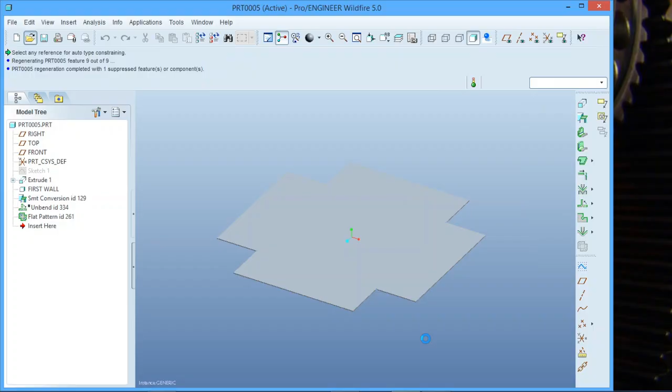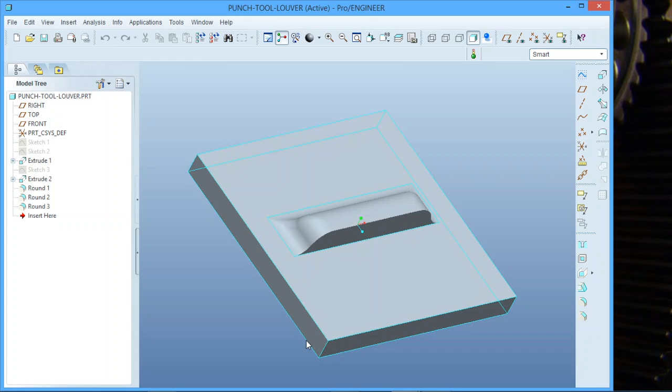So obviously if we're going to punch, we need a punch tool. So the first thing we're going to do is create a punch tool. I've already created one, which I just want to show you guys. This is just a normal louver tool. Depending on the dimensions of your louver that you need and want, you design this extrusion. The most important part is this surface here, because that's what you're going to align your punch with. This can be thinner, 5mm, 3mm, 1mm. I've made this one 10, so it's fine, I'm happy with that. I'm only going to use the front reference here anyway.

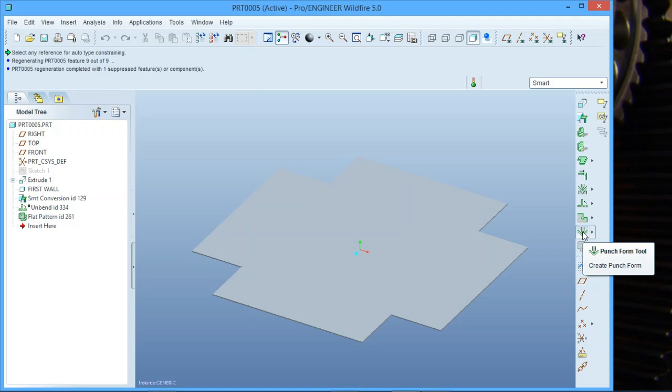So then we're going to go back to our part. Now a neat little thing is, if I click on my punch tool right here, you'll see the flat pattern will go back to a suppressed state, because we need to punch it in its fully formed state and then it will go flat. So let's click on here, and as you see, there it is.

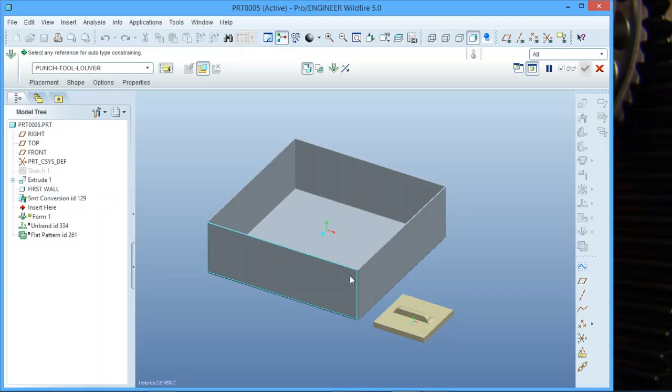I've already selected my tool there on the previous one, but let me just show you how you do it. You just click on this little window here, click on your louver tool, say open. Now there's two ways to do it. You can do it like this, where it's giving you this next to this, or if I click window in window, it will give it to me like this. Then I can select there and all my surfaces. But if I don't want to do it like that, if I do that it will take that one away. If I don't want that one, I click on that one and remove it, and then it gives me this tool.

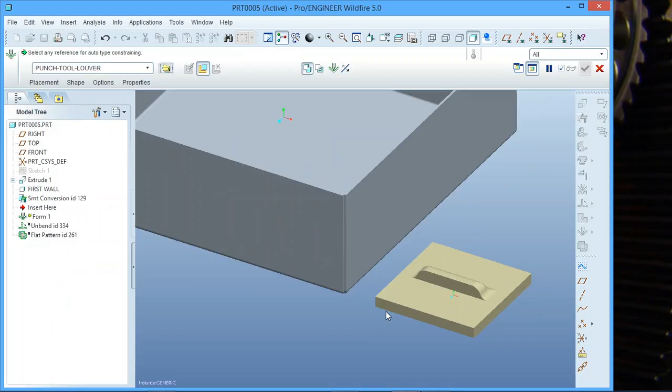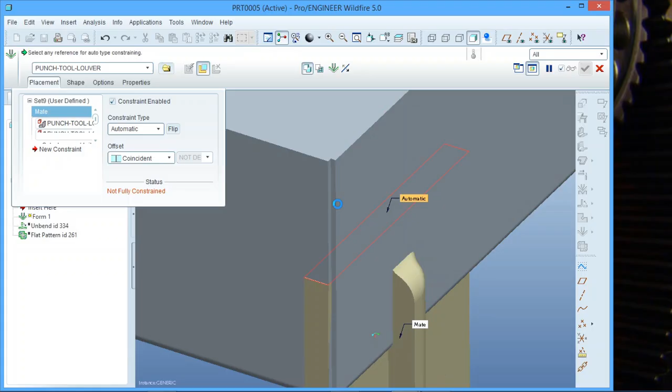So okay, to begin, as always your placement, we are going to click this surface here. Then we are going to click the back of the sheet metal there. Then we're going to select this face here, and we're going to select here, flip. Okay, and then we're going to select this face here and this face here.

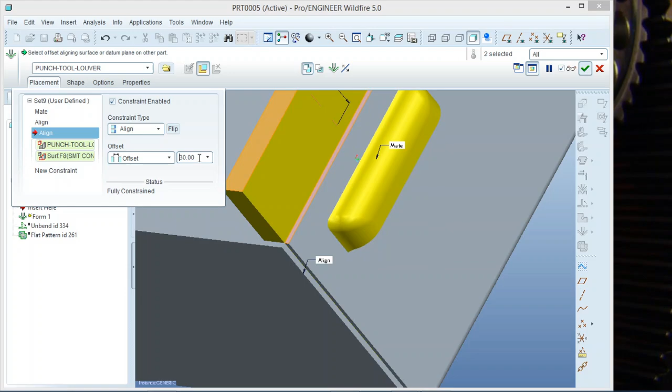But now this one I want to do offset a little bit, so we're going to go up here to about there, so call it 30. Okay, like that. And we're going to say okay.

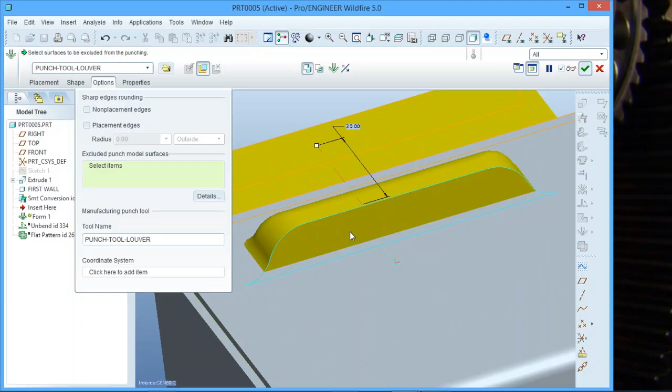Well, first we're going to go to options. Then we're going to click on here to exclude that surface. Then we're going to click on this, because this is where we want the open space over there, as you can see there. Then we're going to say okay.

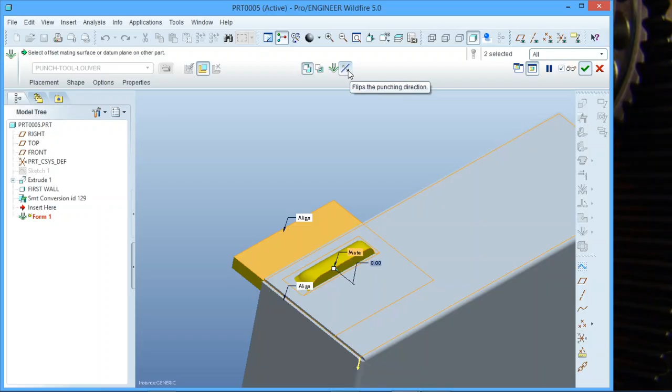Okay, sorry, first let's just go back here, edit definition. Our direction was the wrong way, so flip the punching direction. And then we say okay. And then it will work.

So if we go, now as you can see there in your flat pattern, there's your louver. So all we're going to do is we're going to suppress this again.

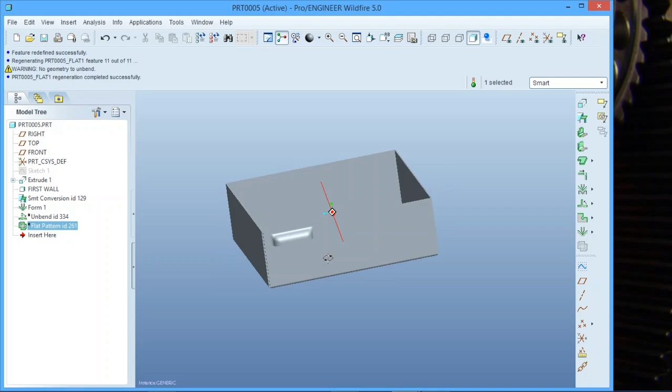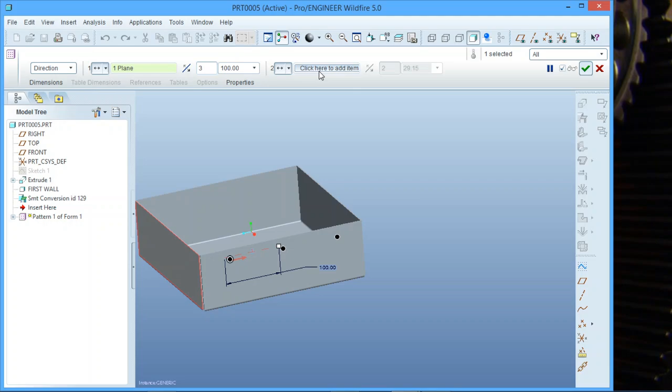Okay, and now I need to pattern this, so we're going to go edit, pattern. We're going to say confirm. I'm going to say direction, click here. We're going to go this way, we're going to go 100. Okay, we're going to go 3. And then we're going to say okay.

And then we have 3 louvers over here. But now, as you can notice there, our tool has made an issue there. So all I have to do now is I need to go back to my tooling.

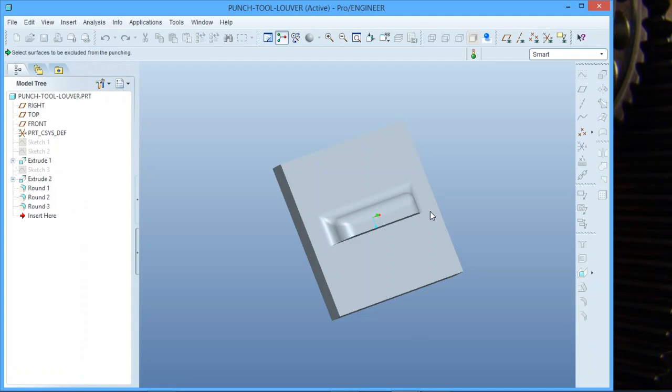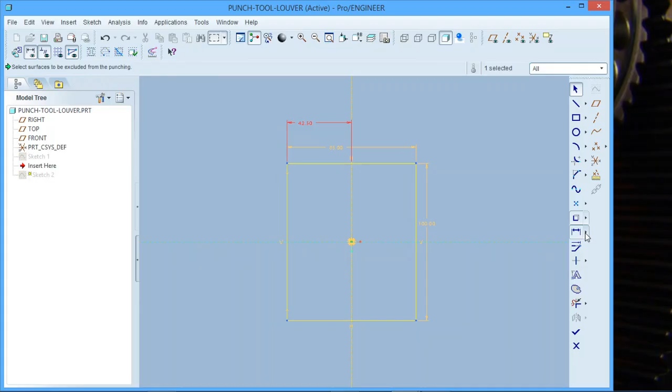So we're going to go open, tooling, punch tool louver, open. We are going to change this block, so we're going to go sketch, edit definition, make this 85, enter, make this 42.5, or if you really want to, you can go over here to your tools and make it symmetrical. Then we can just remove that and say okay, okay, and save.

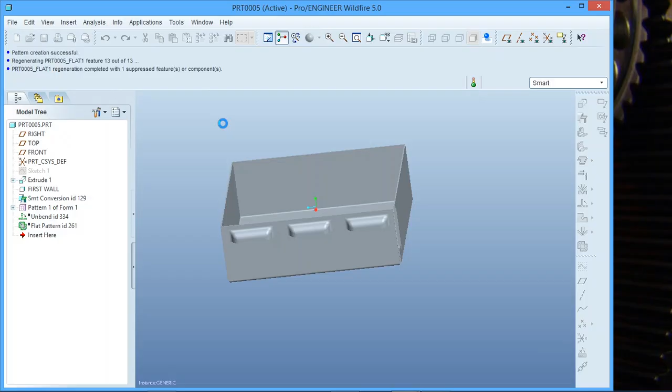Okay, now if we go back to our part, we go edit, regenerate. As you see there, that little dent is gone now. So there's your louvers now.

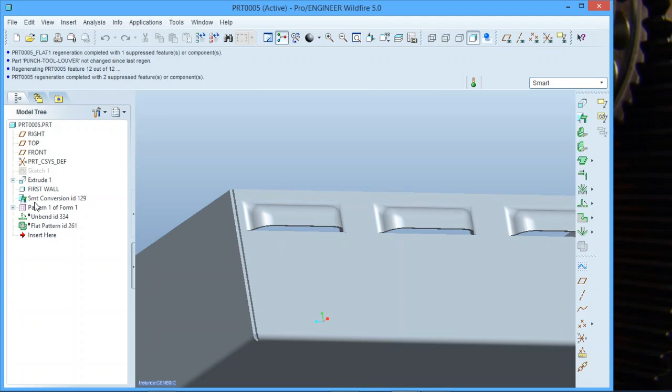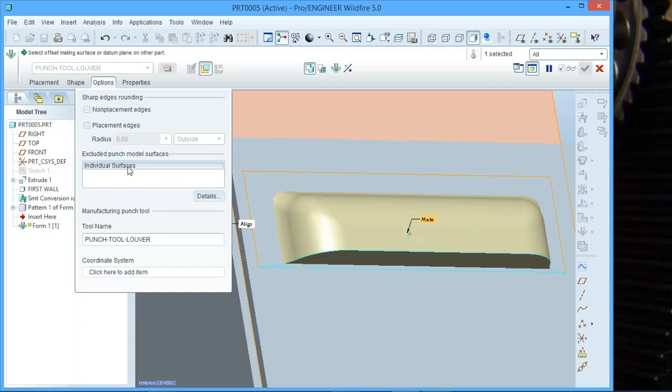If I did not want these open spaces here, if I just wanted to create a dent, all I have to do is go back to my form, not your pattern, your form, say edit definition. I go to my options here, I can remove the surface. Well, we said that one was that one, but we're going to remove that. I'm going to say okay.

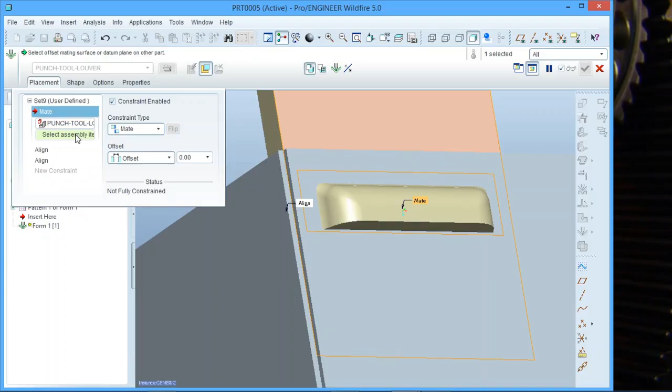Placement first, because now our placement has changed. I'm going to go there, there. Our mate is going to be there, and we're going to say okay. Now notice there's no opening, which is a bit unrealistic, obviously, because your sheet metal would not move like that, but I suppose not impossible.

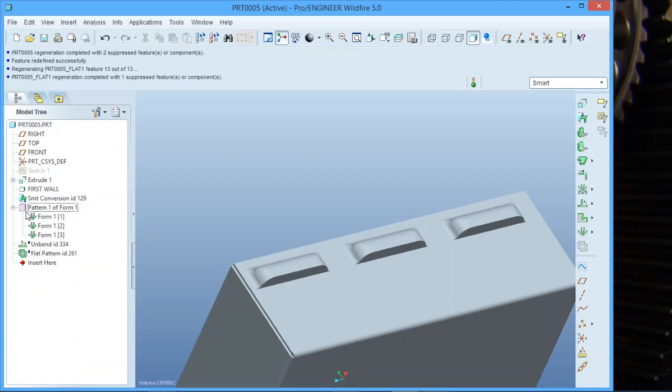Okay, so again we go back here, we say form, edit definition, options, click here, select that face, and we say okay, and there it will give you your open louvers.

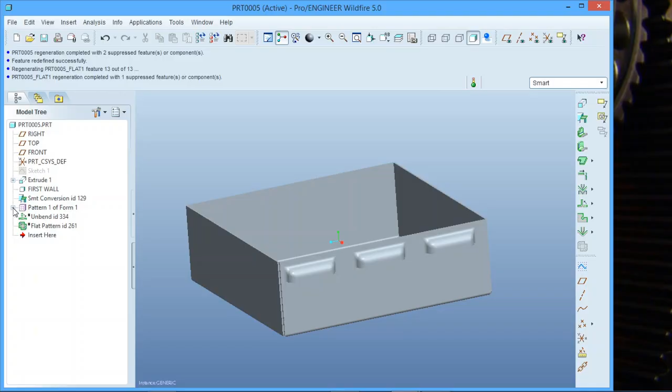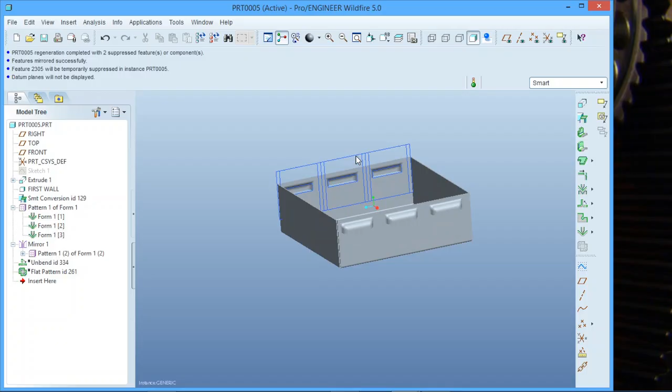Now the other thing is I just want to mirror. I'm going to click there, I'm going to say okay, and we have mirrored. I'm going to hide these, hide, hide. Now we've mirrored our louvers.

Okay, so now worst case, if you go back to your flat pattern and you say resume, as you can see there are my louvers.

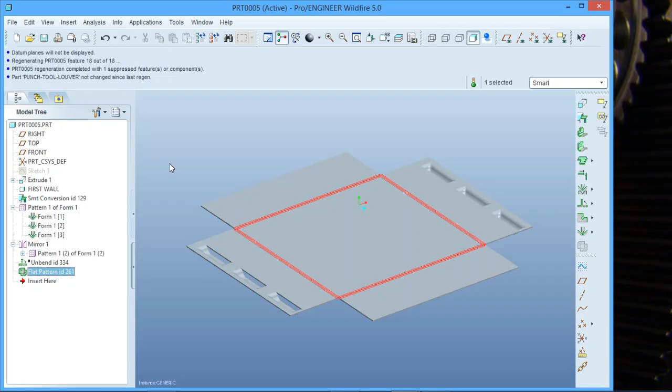Easy, so that is your punch tool. You just have to be clever about the way you're making your tool. As long as your tooling is correct, you shouldn't have an issue doing this to your sheet metal parts. But yeah, I hope you guys enjoyed that, I hope it's helpful, and let me know if you need any help with anything else.